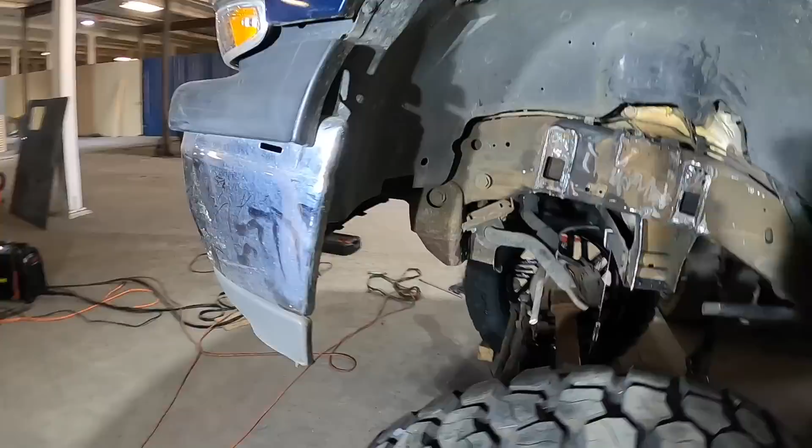It's a good level. From the tire to the fender is 23 3/4. I had it at 22 3/4, then 23 3/4. Dropped it down an inch because I figured I can trim this right here and get plenty of space.

It's got about 10 inches of travel. After compression, it's going to have about 7. So now what I want to do is 3D scan this right here, and then possibly 3D scan this and the shock tower, and then suck it into Fusion 360 so I can make an accurate mount for this.

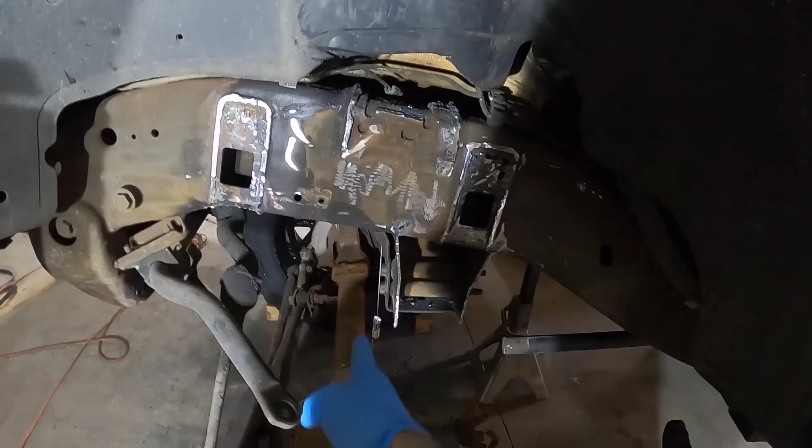So I've got this line right here. I'm going to stick something on here so I know where center's at and know where I have to work around, and then kind of do the same thing down there. What I'm going to do is lightly spray paint this gray so the 3D scanner will pick up on it, and then get the design in it and maybe make some mounts and go from there.

Alright, so I don't know if you guys can see it too well, but here's the scanner that I got, and here's the scanner software. It's kind of hard for me to show you, but when we get close here, you can see it represented down here on the screen.

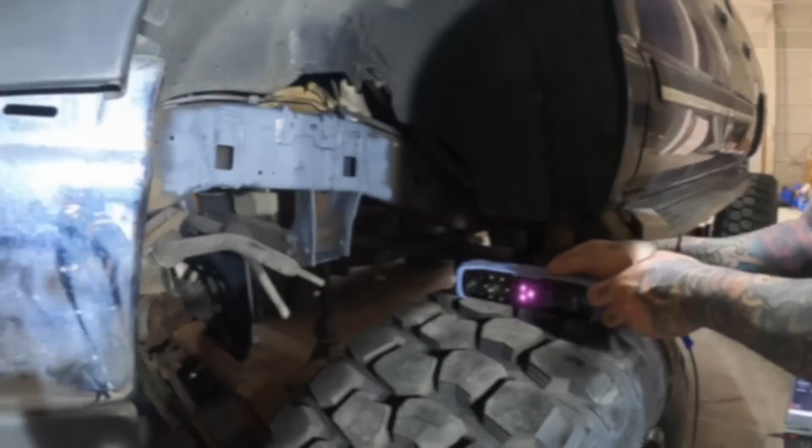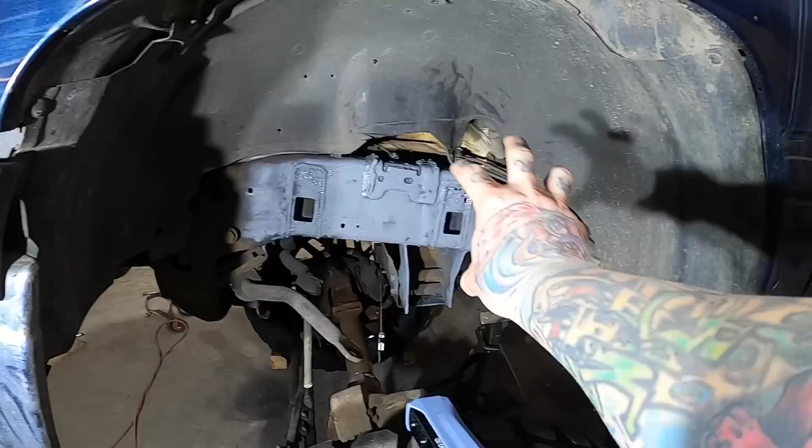Alright, so I scanned that top part there. It's really hard to film and do it at the same time, you can't really notice it. But this is the scan data that I got here. I don't know how well you can see that, but it's really, really good scan data.

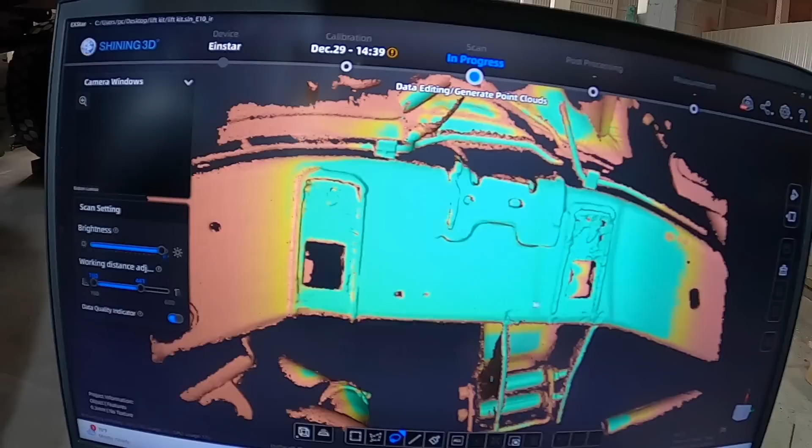And that's not even the finalized mesh. So really all I needed was this part right here, and then this part right here. It even has the side pieces - now I can make a plate for that, cut it out, weld it in there, which is awesome. It even picked up some of the brake hoses, and this is just a real quick scan too.

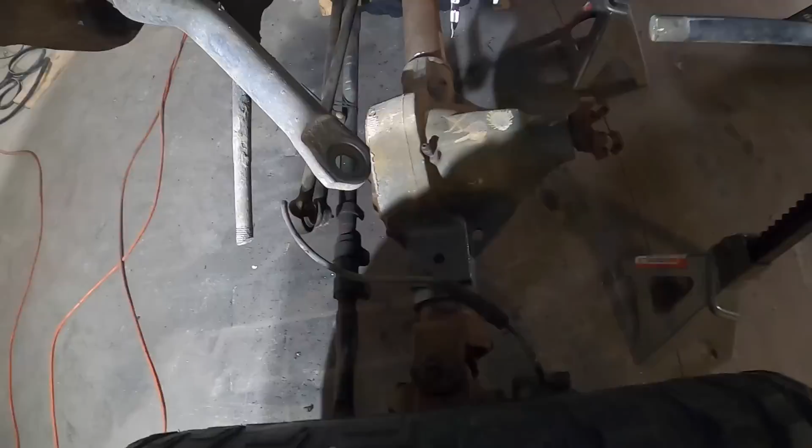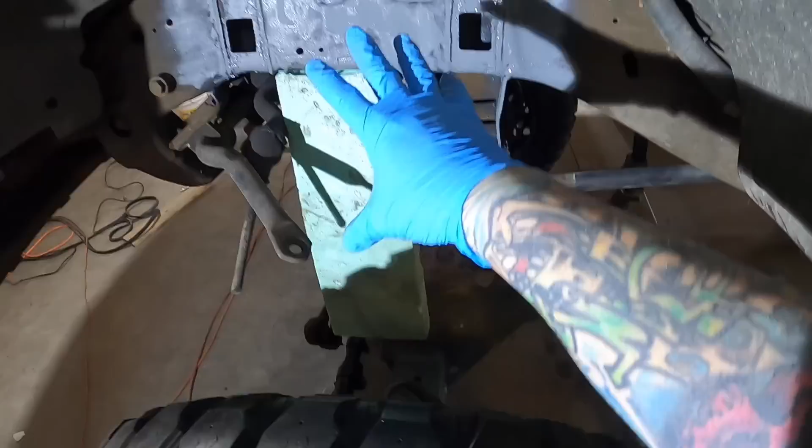So now what I want to do is do a separate scan down there and see how that comes out. Alright, so at first I had scanned just this part and that part separate, the axle, and then I thought about it and stuck this piece of styrofoam in there so I could try to get the scan to scan all the way down and get all of it together as one piece, and it actually worked out pretty good.

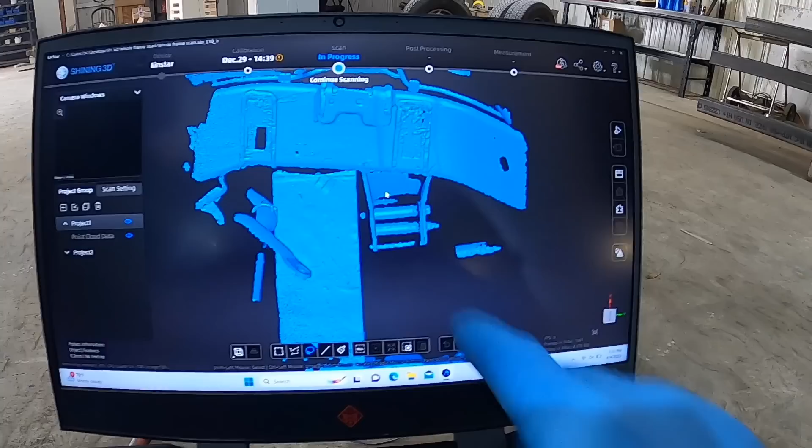I got all the data that I need. I don't know how good that comes up on camera, but I got all the mounts there, the frame. Then I can also come in here and make this little triangle piece right here to fill this in, and then it goes all the way down here to the axle. So I got all the information I need on the axle.

Got that little mounting spot right there, you guys can see that. And that's a pretty good scanner.

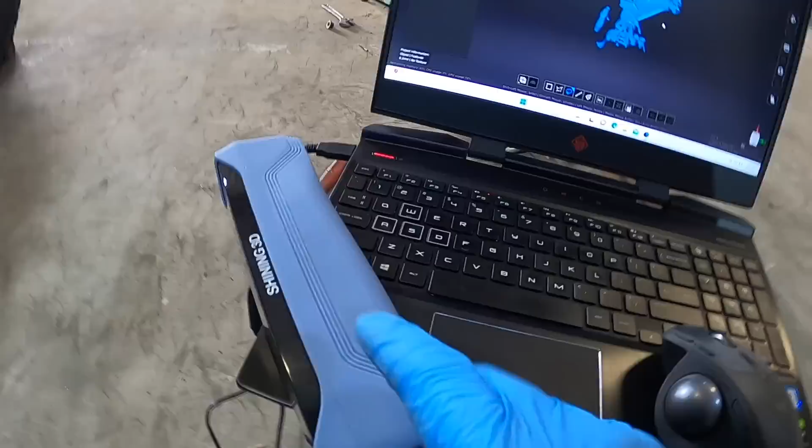I'd used another scanner before getting this one, and it kind of sucked - that Revopoint POP 2, you couldn't do anything with that thing. So I ended up getting this Einstar by Shining 3D. This is a really good scanner. It wasn't much more, like 800 bucks, 700 bucks now. But the level of scans you get is pretty crazy. I haven't been able to really utilize it until now, so this will really help me along.

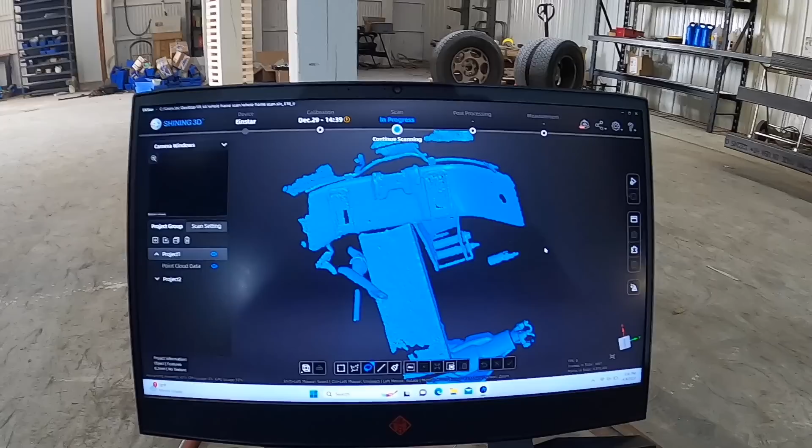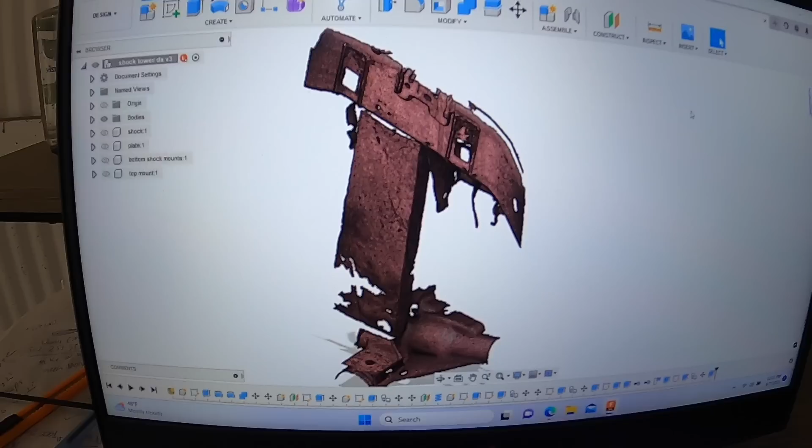Alright, so you can see the results here of my scan. This is the scan data right here, and you can see this is the frame right here, and then there's that piece that I wedged in there. So there's the frame, there's the piece I wedged in, there's the mounting surface down there on the axle. And then what I did was modeled up a shock, and then the plate to cover that, the bottom mounts and the top mounts.

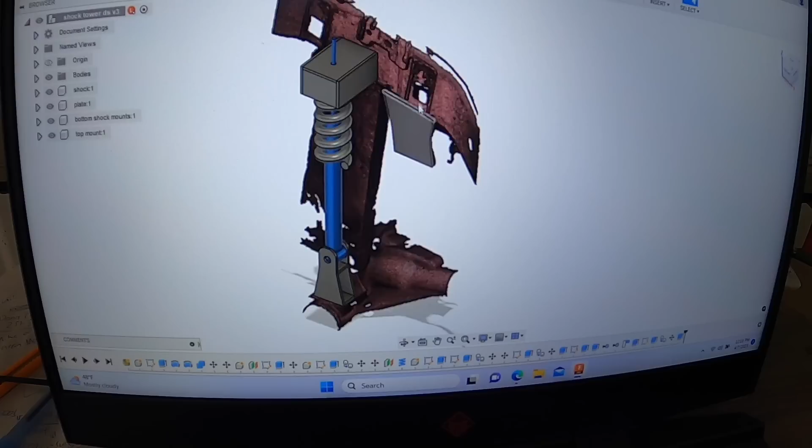So you can see here, I'm gonna put a plate on the side there too to reinforce that. But that's pretty much the lift. And then underneath here, I designed a little pocket to hold the spring, so it should sit in there like a cup.

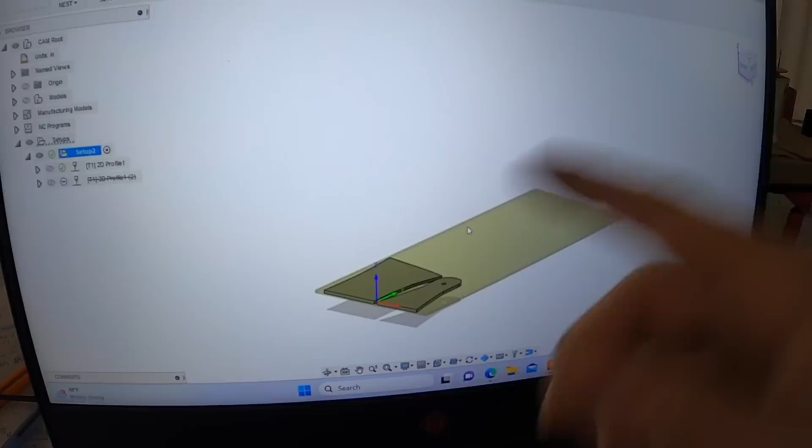Now all I have to do is go over to the plasma table and start cutting those parts out. You can see here I've already started to line some of that up, and I've cut some of these out right here. Then I got to cut them out and weld them up. Got my pieces cut, about to load up this material - a brand new 4x8 sheet of 1/4 inch plate.

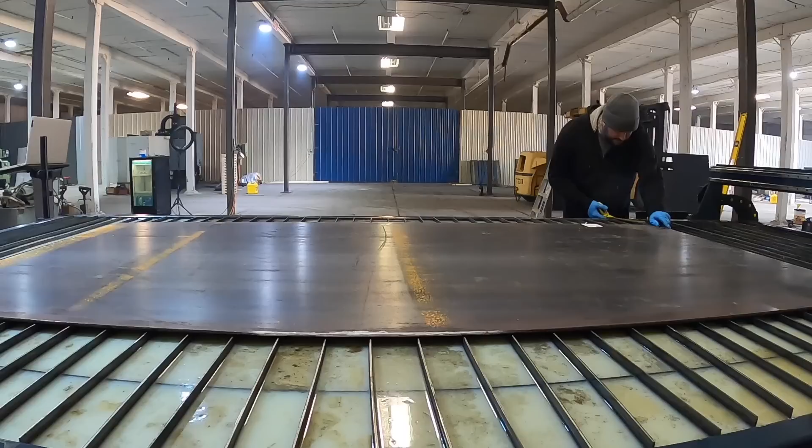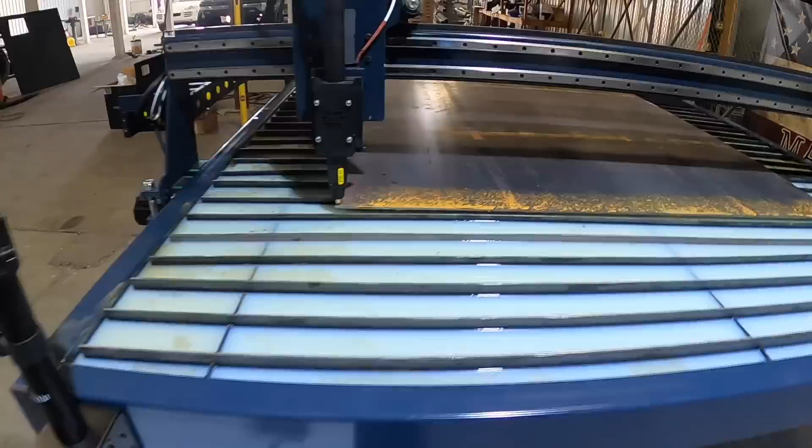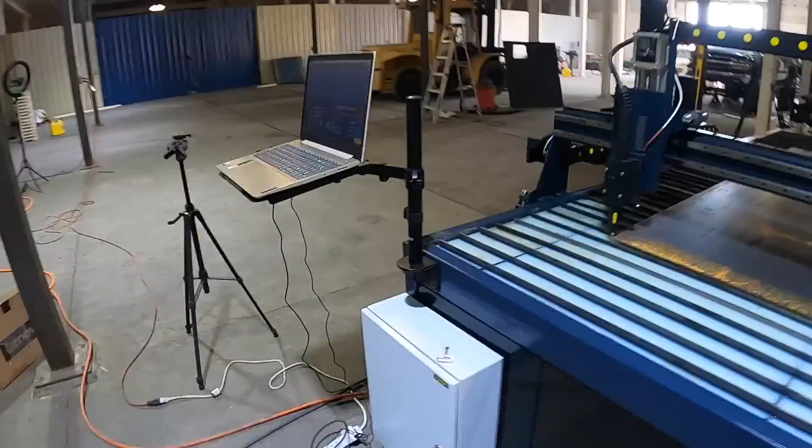All right, so I got my whole cut file in here, ready to cut the brackets for the other side. Getting ready to cut it out. If anyone's wondering, this is a custom built plasma table that I built myself. Took me a couple months and some research. So it's built, not bought - I built this myself. So let's get to cutting and see what happens.

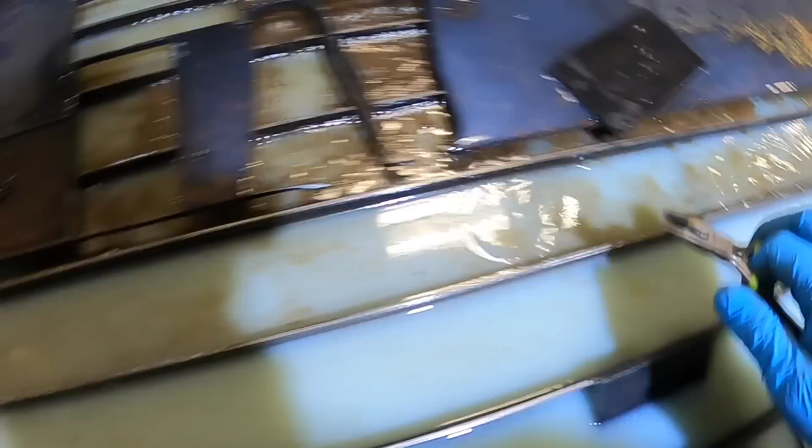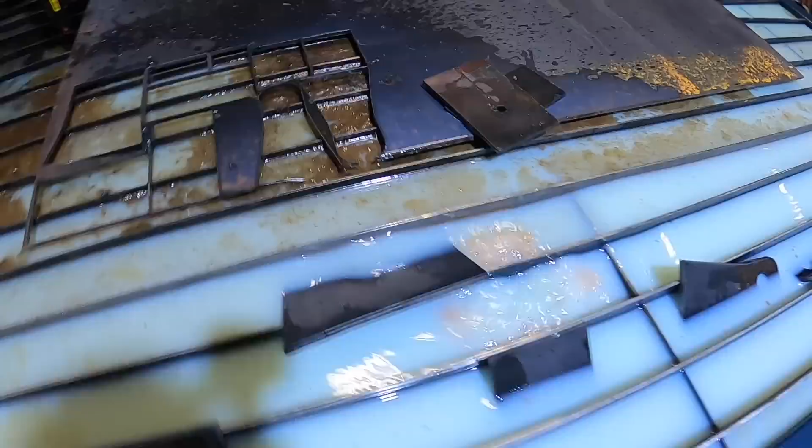Cycle start. All right, so you can see here, got all the parts cut out. I was pulling the ones that tipped up out as they were coming out, so they didn't hit the plasma table or torch. As you can see, nice and clean cuts - they come out perfect, barely any dross on the back. I got it dialed in pretty good. So I'll get these all over to the bench, get them cleaned up, and start welding it up.

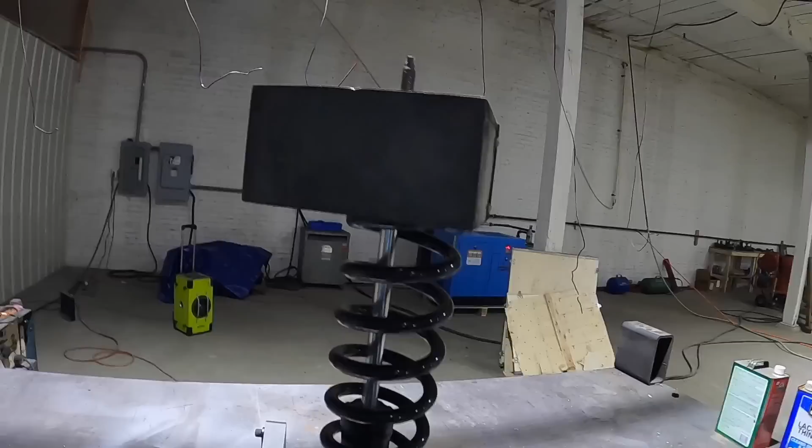All right, so check it out - this is the whole assembly here. I'm gonna put a gusset plate right here to hold that more steady, but that takes bigger bolts. This is pretty much it right here. I'm actually gonna weld a thicker plate on the bottom of that. But you can see that's the pocket that is gonna get welded just like the factory one to the frame.

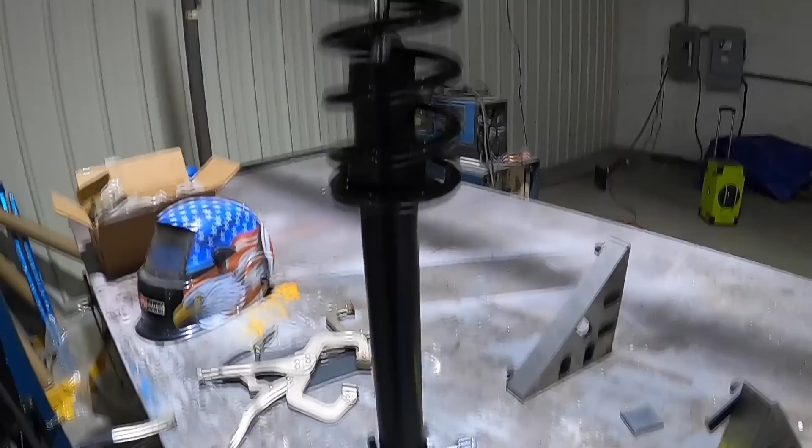So this looks just like that factory one that I cut out, where it has the cup - the compressor - and then the spring sits up in there. That way it can't jiggle around. But I think that's gonna work good. So that's welded up. Like I said, I'm gonna weld some gusset plates in there, weld this all the way out because it seems to fit pretty good.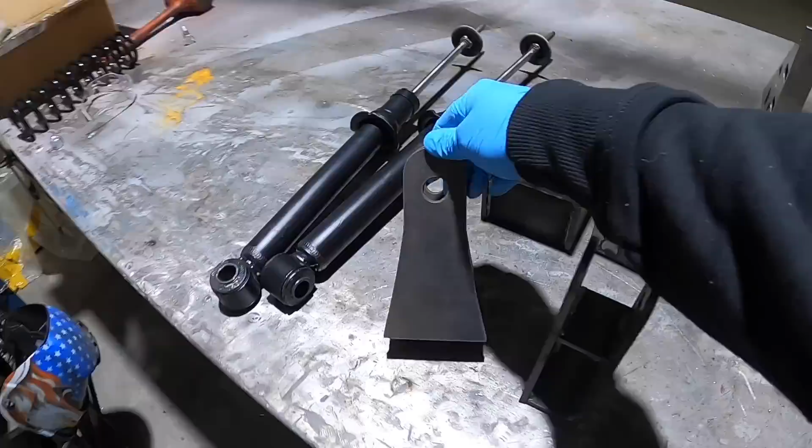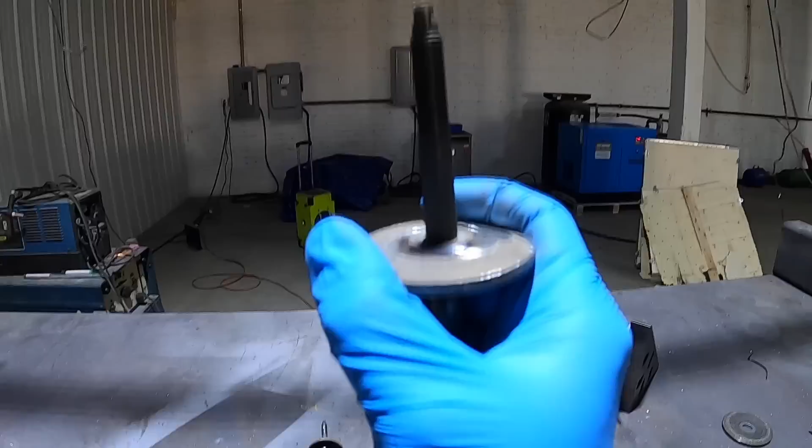That's about it, pretty much got the kit done. So this is the actual kit right here - bottom mounts. This is what's actually gonna give me the lift, is this mount, and then how far down I place these pockets on the frame. And then off of the old shocks that I pulled off, there was this piece right here with a hole in it - it's like a big grommet. So what I did was weld that on here so that when these go through these holes right here, no matter what, there's no way this is gonna come through.

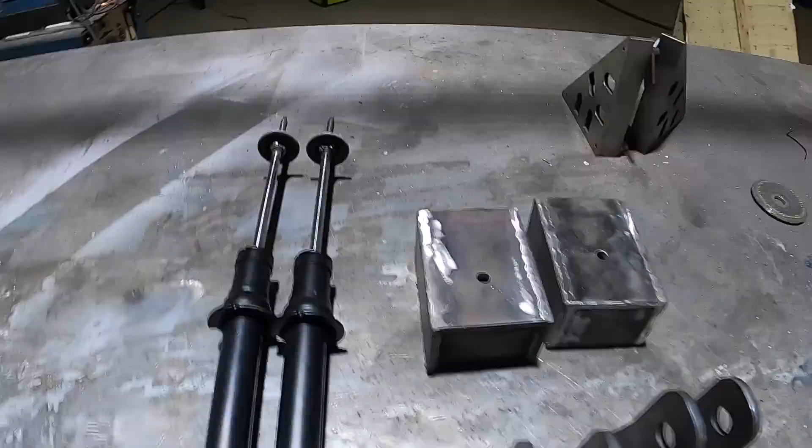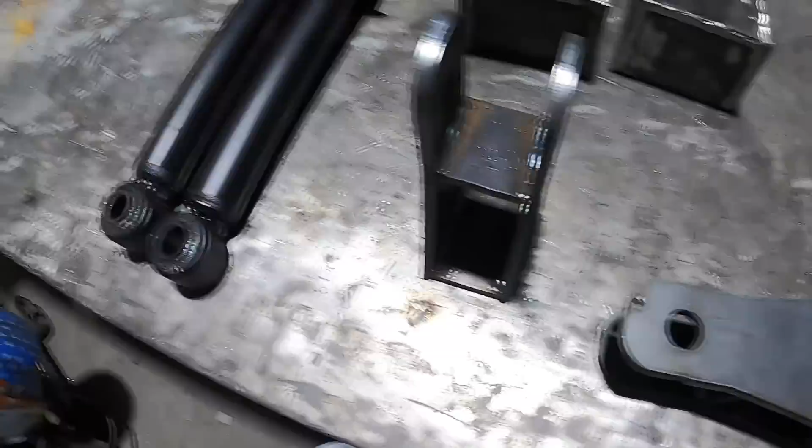So that's pretty much it. These holes, I do them a little bit undersized, and I have to ream them out just a little bit with that Christmas tree bit right there. So I'll get all this set up in my drill press, knock those holes out, make them perfect. They should fit right in there. Let's get to it.

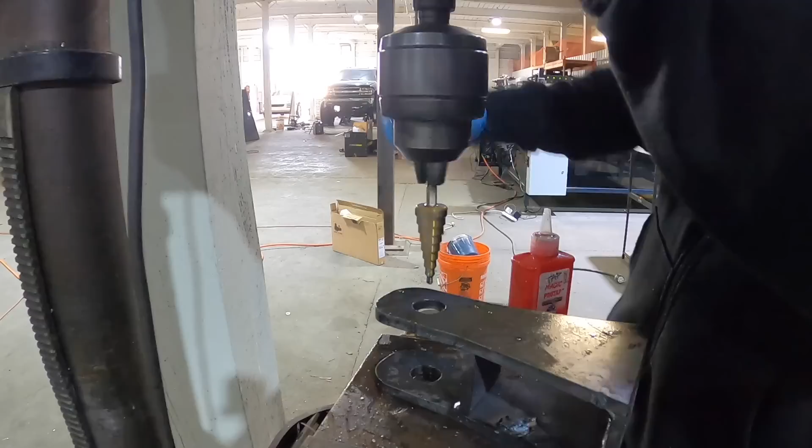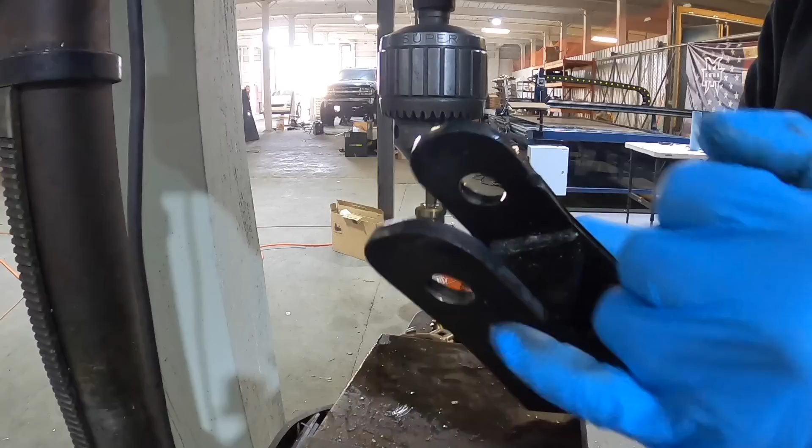Goes a perfect hole. Did I have to do that? Probably not, but I want those bolts really tight in there so that there's no play with the shock.

All right, now that I got the mounts done and holes drilled out, I'm gonna bring the forklift in here, lift it up to the height that I want, the right height, and then I'm gonna start tacking everything in, kind of set it down, see if it sits under its own weight, and see what it looks like.

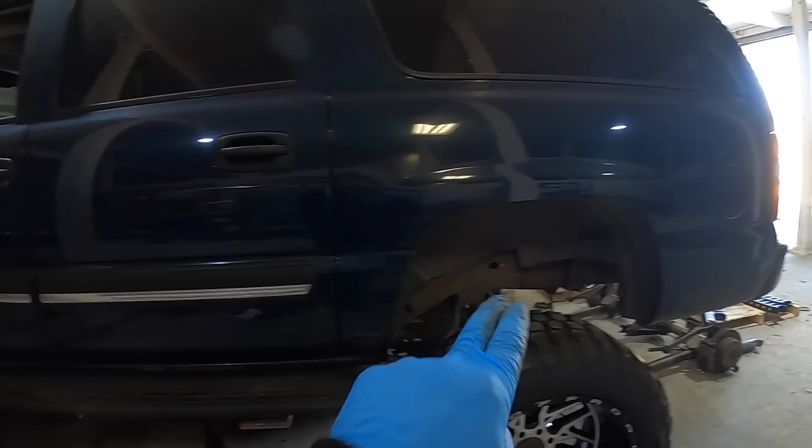I wanted it to sit level. No matter what I did, I kept getting off numbers. I put a level across this body line that's even across the truck, and it's perfectly even. But this fender seems to be down about 2 inches compared to the other one when the body line sits level, which I don't know if it's correct, but I'd like that body line to sit level.

So I guess the fenders are going to be a little bigger in the front than the back, and that's probably how it is stock, I just didn't realize it. But now the body line looks like it sits pretty level. So that's what I'm going to go with.

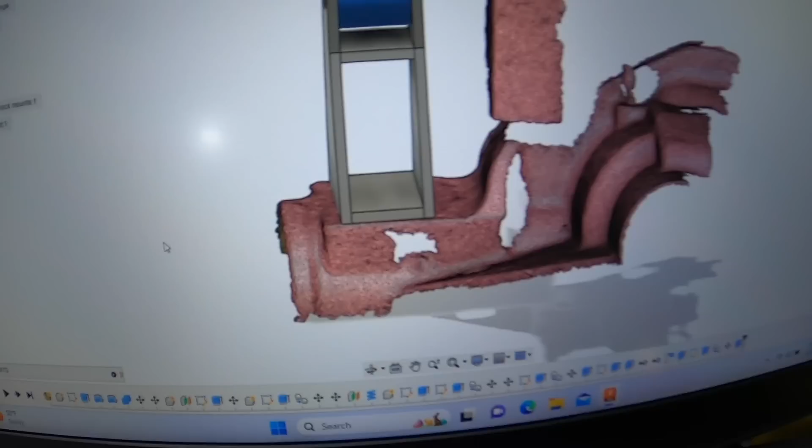Now that I've got everything leveled out, and I've got my 3D scan here, what I need to do is go through and measure where everything sits, like from the corner of this to the corner of that.

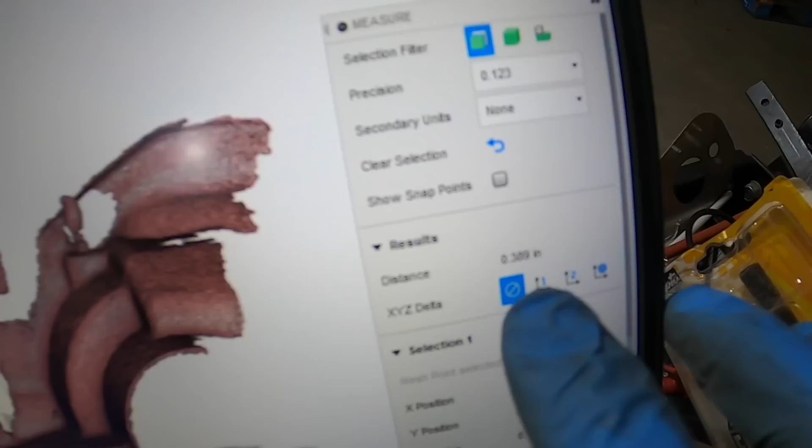0.389 of an inch, so 0.4 of an inch right there, from there to there is about where that sits. And it sits, I designed it to sit all the way across. Oh, maybe I didn't.

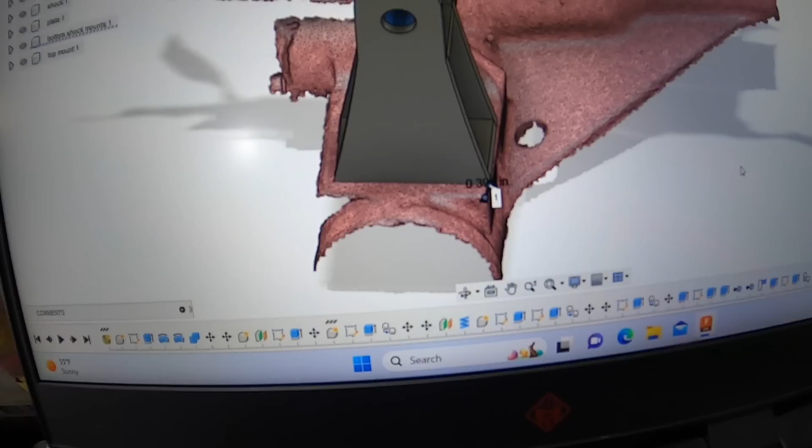So the front side sits flush. I'll go flush, and then from here to about there is 0.39 of an inch, about 0.4 of an inch, and then mount that there. Then I'll do the same thing over here with this mount. I'll just figure out where it's going to sit, measure it all out, and get it in there.

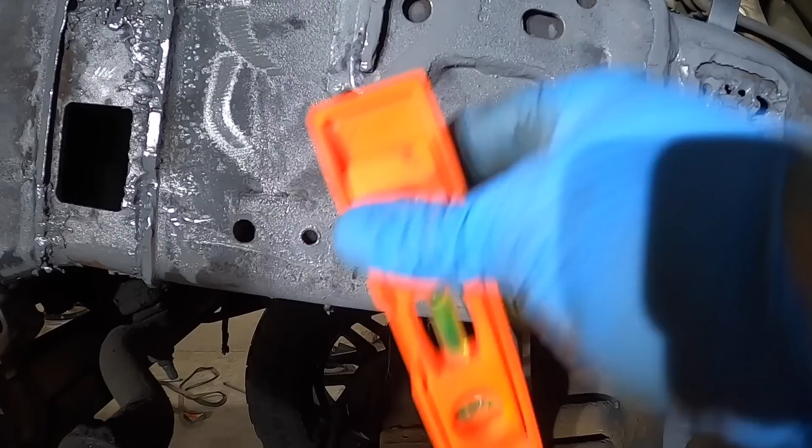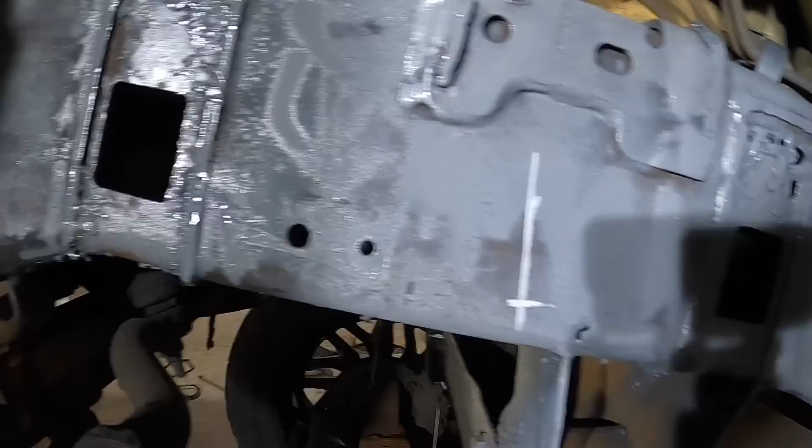So here I went over to my design and measured from this corner right here, that little point, over to where the box should start, then measured from right here down to where the end goes. Now I put my level here, and I got this line exactly level, so it should be exactly straight, which you can see it is from the bubble. But if I can get it over here in the right place, so it's right there, now I should be able to mount this in the correct location to match up to that down there, according to the scan.

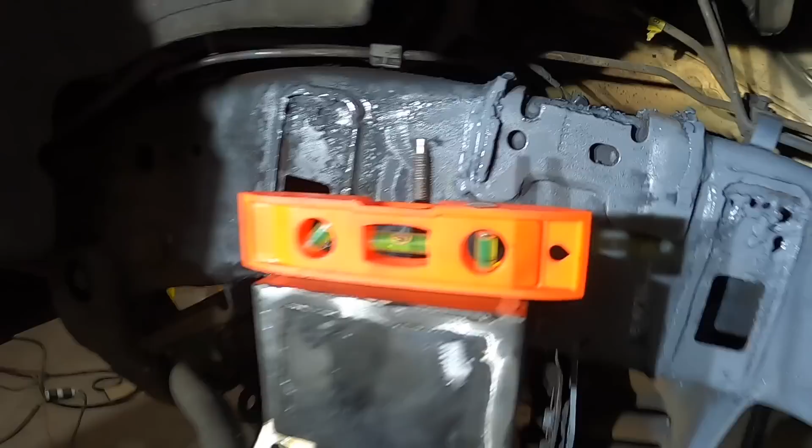All right, so it worked out pretty good. I moved the axle just a little bit forward, centered it back up to more like where I scanned it. It's just a little bit off. You can see my scan line right there, the line that's level. So I moved it maybe a quarter inch forward, and you can see I have that mount perfectly level.

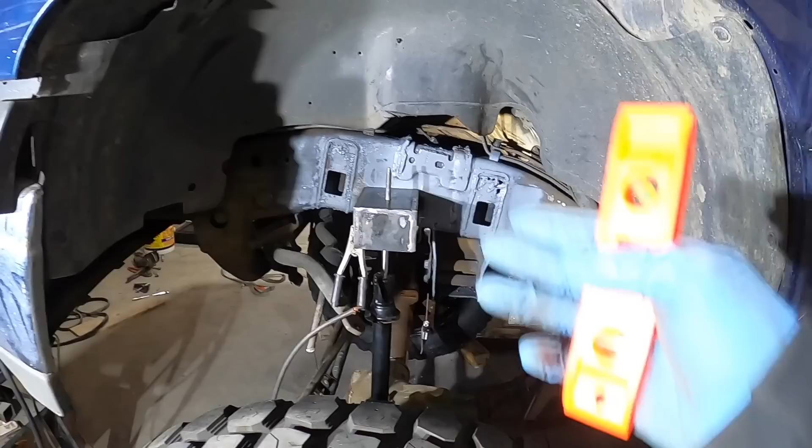The shock now is perfectly level, and the mount platform where it's sitting is level. So everything's level all the way across now. It should be good. I should be able to stick a shock in there, drop it down, get that preload on there, and see what happens.

I'm going to actually mount the other side first, then come back and do that and see how it all sits. I got both sides tacked in there. Got that one on there, got that one on there. Got everything level.

This one's in there, got that plate filled in that gap there. That's level. So now what I'm going to do is lift it, stick the springs on there, lower it back down and see where it sits. I didn't want to tack it too hard just in case I have to move these mounts, so hopefully the spring tension will hold and not pop the tacks, but we'll see.

So there it goes, it's got some weight on it. The back is kind of floating on the forklift there. Yep, it's got weight on it.

Well, just caught that on camera. Tacks broke like I thought, but it's under its own weight. It's funny I caught that on camera. I put bigger tacks over here. It's under its own weight. Right where it's at's good.

This is actually holding the truck up right now. I think that's a good spot. Both, before the tacks broke, both the fenders are in exactly the same height. The frame just looks different on both sides. The one over there curves up more than over here. It's kind of weird, throws me off a little bit.

Now let me jack it back up, fix those tacks, and that's it. It's under its own weight. All right, so I got it under its own weight, fixed the tacks. It's riding in a great spot. I have to put a little bit of a shim underneath here just to get that nut up a little bit on there. But other than that, sitting under its own weight.

So you see when I bounce it, see it barely moves. The only thing that's moving really is where there's no nut there, but you see the springs barely move there. I think that's perfect. I think that worked out good.

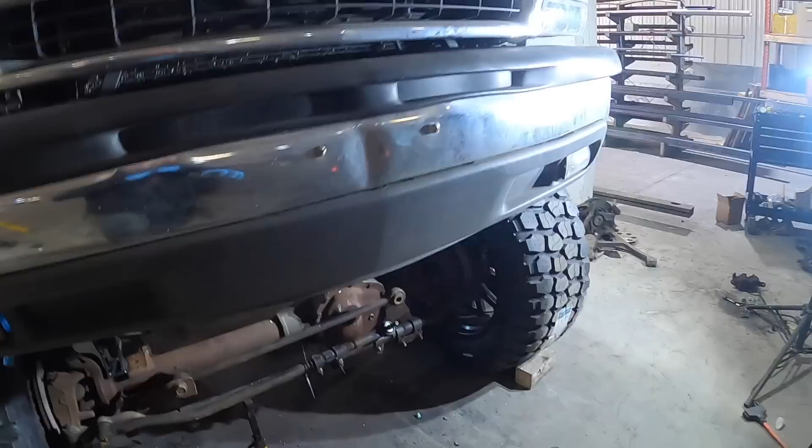When I first put it under its own weight and that tack popped, the axle rolled a little bit and shifted over that way a little bit. So I do got to move the axle back over before I make the trailing arms.

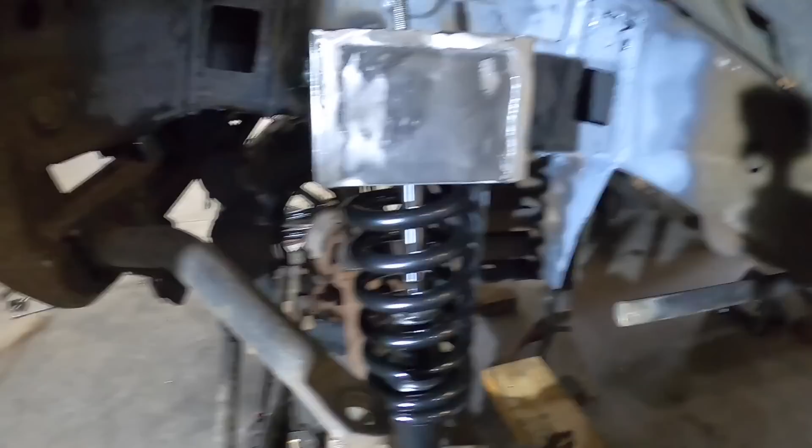But good progress for today. Got it under its own weight here. You can see here too when I bounce it. So I think these struts should work out good.

Once I put a nut on there and a spacer on there, it'll also bring it up about a quarter inch, get it right to 23 inches. From here to here is 23 inches. And like I said, these bumpers are kind of bent from whoever owned it before me. I'm going to take these off, put new ones on, and they should sit straight.

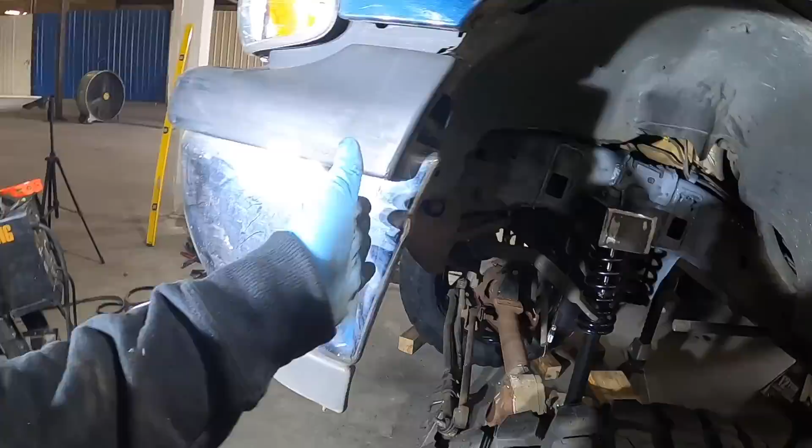But I think that's pretty good, especially for a street truck. Like I said, I'm not going to go crazy and off-road this thing. It's just I'm just going to daily drive it. And I just wanted to see if I can do it.

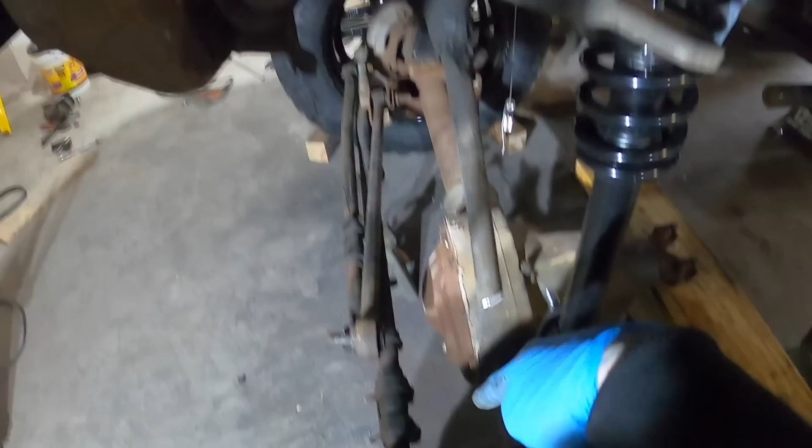So these mounts here, I kept these on so I could see where they were gonna sit. And I think they're gonna work out great. I think what I'm gonna do is cut these off and move them back. Move the mounting points back a little bit so they're away from the spring. And then drop the rods down there, have mounts come off back here. And that should be good for these. So I'll be able to use the stock mounts. It's pretty good.

I still gotta put that filler plate in there on both sides. And then clean all that up. But that's about it. It's pretty much what I did was designed it exactly like the stock struts were.

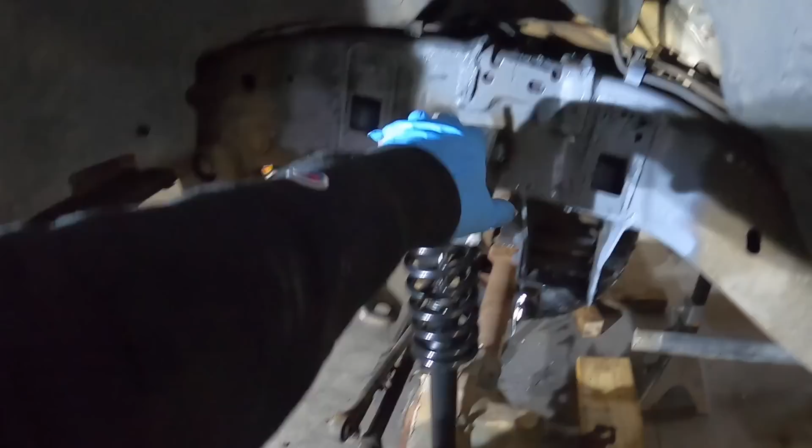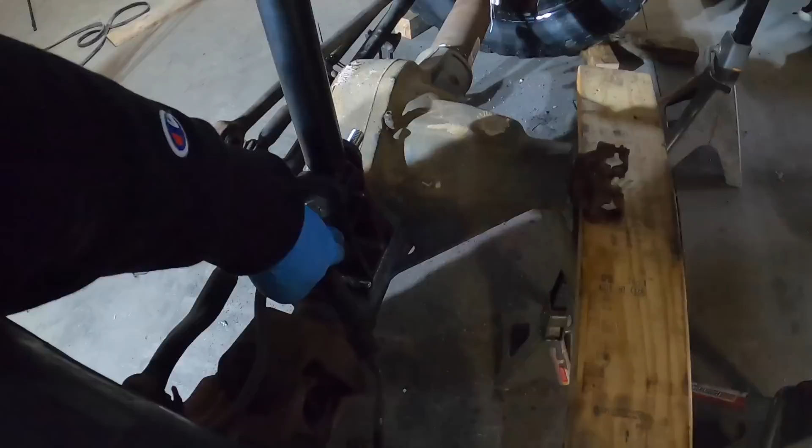So the pocket was up here. Now the pocket's down here. And I had these had the torsion bar, so it didn't have springs, but you know, there's mounts down there. And that's pretty much how it would be factory. And all I did was got my lift by moving this up and moving this mount down, and that's how I got the lift for the truck.

I like it, we'll see how it works out in the end. Now I got to do the rear. Once I get the rear in, then I'll start working on the trailing arms to lock all the axles in place, and I'll make sure that they're moved over and perfectly aligned before I do all that stuff front and back.

I think these have to come out a little bit more. I had these perfectly lined up when I mounted everything to begin with, but like I said, when it rolled on me a little bit and that tack broke, it shifted a little bit. So the mounts are in the correct spacing for it when it is lined up.